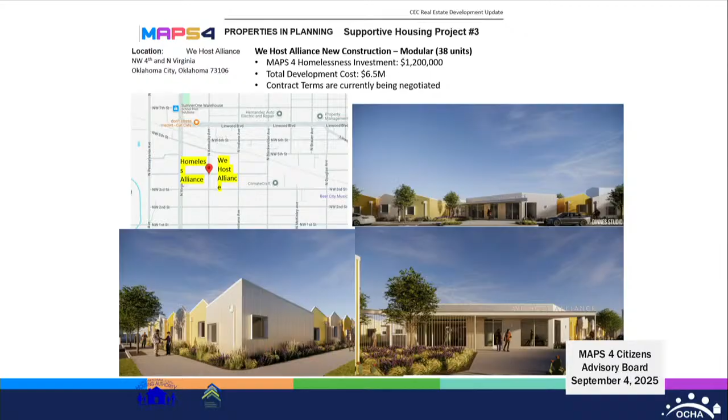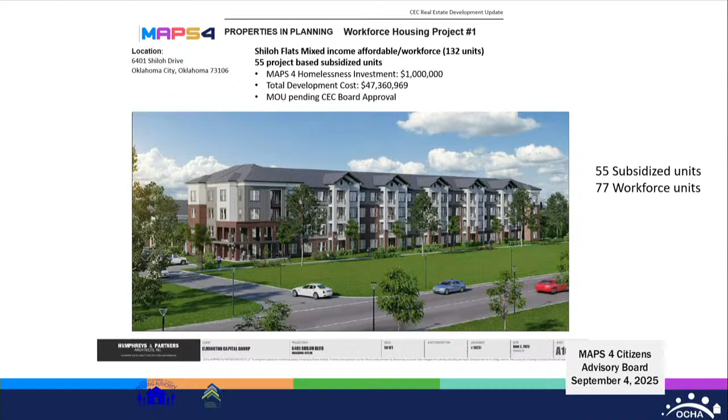That was probably the quickest project that we will have in this entire program, so I'm really happy about that.

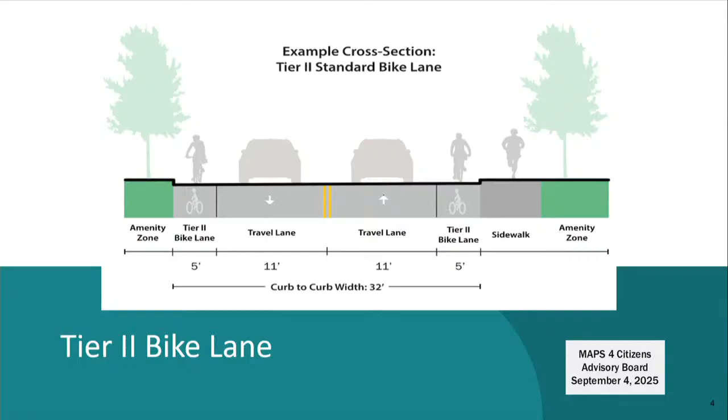Tier 2 is the same thing, just without the addition of the delineator. This is typical for situations where there's a lot of driveways or trash pickup locations - we don't want to create any conflicts with trash collection. Tier 3 is just the shared lane, with a Sharrow placed strategically in the lane depending on lane placement, accompanied by a share the lane sign.

For this contract, RCC Traffic was selected. The contract amount came in at almost $1.9 million. We issued a notice to proceed on March 17th of this year, and the current anticipated completion date is December 10th.

An update on where we're at with construction. We've installed to date a little more than 31,000 feet with almost 200 pavement markers - that's Sharrows - for this project. To this point, we haven't been able to put any bike boxes down yet.

The signal detection has been completed. This doesn't have anything to do with the signalization at 19th and May, that is under construction as well. However, the signal detection upgrades were completed at specific locations that didn't have radar detection to detect cyclists whenever they pull up to the signal.

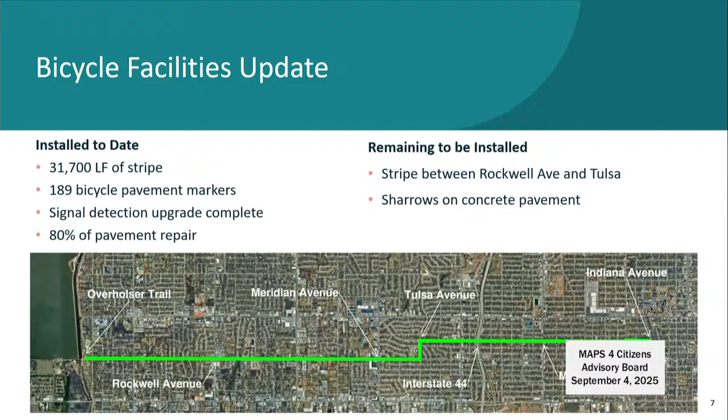This says 80% of the pavement repair is complete, but as of today, all of the pavement repair has been finished. What remains is striping between Rockwell and Tulsa along 16th, and the Sharrows that go on concrete pavement. The Sharrows haven't been installed on concrete yet because it requires a different piece of equipment, so they're doing all the asphalt first and then coming back to do the concrete after.

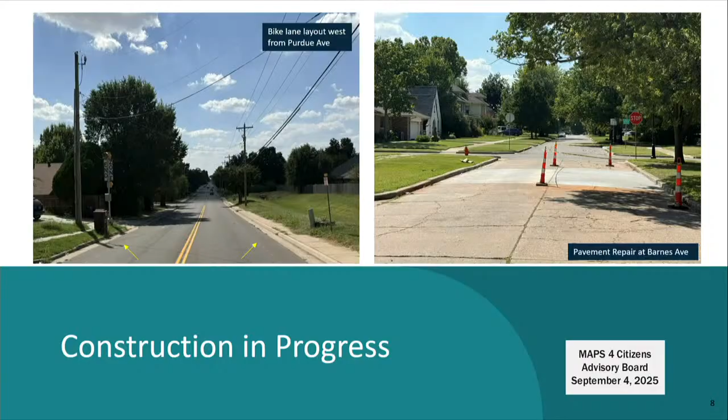You can see in the left picture the yellow arrows point toward where they've already done the layout in preparation of adding the bike lanes along 16th. This is going to be from Rockwell a quarter mile to the east, and between MacArthur and Meridian there's bike lanes there. The right picture is a completed pavement repair where we went in, removed the bad concrete, and replaced it.

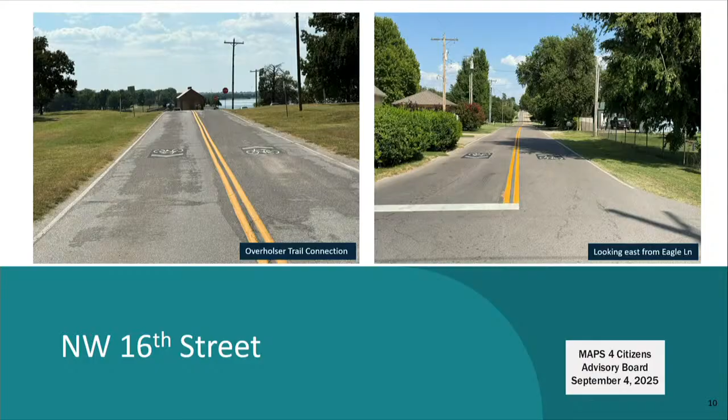Just looking at some of the Sharrows and the striping that's been completed here on 16th Street. This is right around the Council Road intersection, and towards the west end at the beginning of the project at the Overholser Trail, just some more striping that's done along with those Sharrows.

Moving over onto the 19th Street segment, you can see the placement of the Sharrow in the left picture is offset. This is an anticipated location of where it needs to go because there is on-street parking allowed here, so we wanted to place it where we've recognized traffic likes to travel - that way we won't have tires constantly beating it down, hopefully improving its longevity. The right picture is just where we get back into the undivided section and the standard Sharrow placement.

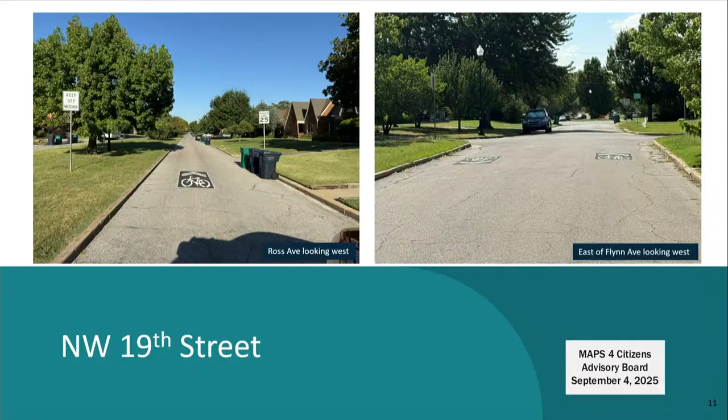The 19th and May intersection signalization update: we have all of the signal pole footings in, including a couple of the pedestrian signal pole footings. The sidewalk on the southeast side is complete.

This week they completed the east center median sidewalk, and we'll be placing the concrete this morning for that northeast corner. The conduit for all the signals has already been installed, and all the pole boxes are already in place.

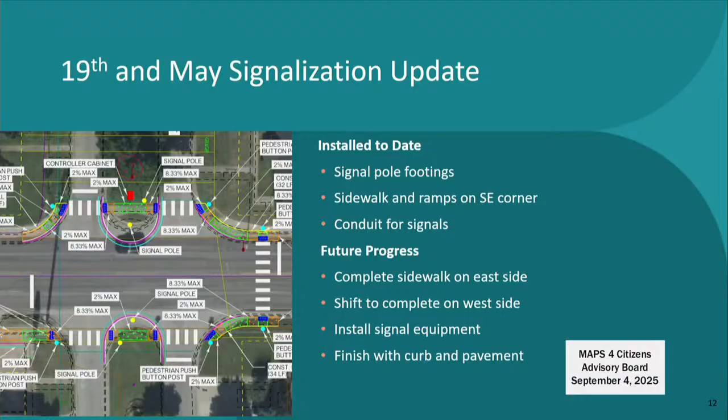That's the southeast corner where we added a crossing for both north-south and east-west. It did not exist before, so we'll now have continuity for pedestrians to cross both north-south and east-west.

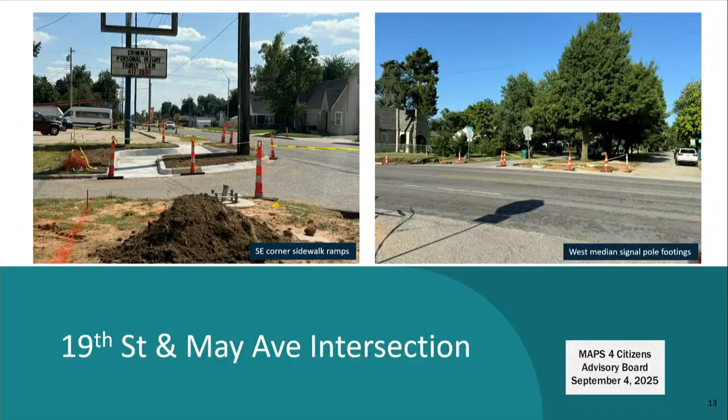The program budget for this was $3.4 million. The original contract amount was $1.9 million. Work to date is a little over $650,000, and the remaining contract is $1.2 million. I'd be happy to answer any questions.

Now to talk about 1B. 1B was Classen Boulevard that extended from Western, where it goes east and west, and curls up north all the way to Britton Road. And then Northeast 16th Street, between Walnut and Bryant.

If you recall, a while back we actually extended it from Katy Trail all the way over to Bryant to make more connectivity with the Bryant bike route.

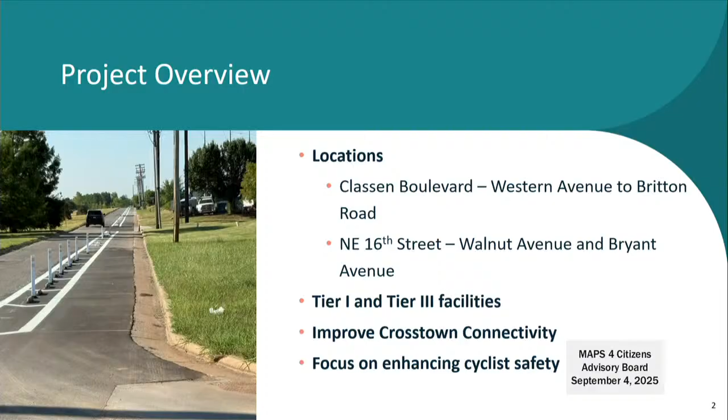With this, we were able to add Tier 1 and Tier 3 facilities, improving crosstown connectivity on the east side of the city, and focusing on enhancing cyclist safety along both corridors. Again, Tier 1 has that protection component to it.

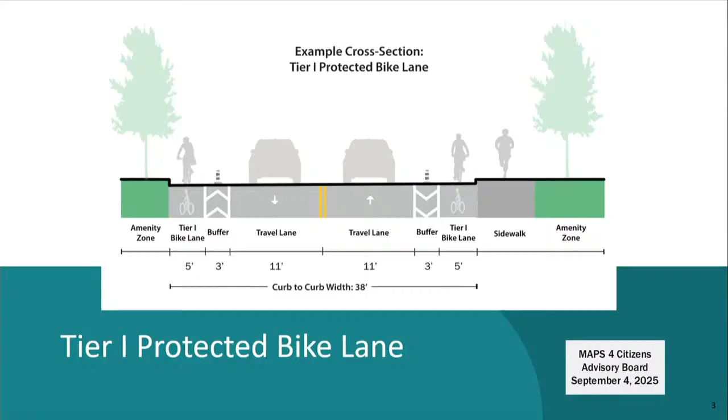We did a little bit of a different style on this, and you'll see some of that in the pictures. There were no Tier 2 facilities, and Tier 3 was again that shared facility, which was a significant portion of the Northeast 16th project.

The contract on this was, again, RCC Traffic. It was a $3.4 million contract. We issued the notice to proceed last November and anticipate it to be completed today.

An update on Classen: we have installed a little over 41,000 feet of stripe, 83 bike pavement markers, mostly bike boxes but also some sharrows. Over 500 delineators. We did a little over 4,000 square yards of pavement repair, and we ended up only having to do signal detection upgrade at Chesapeake Drive.

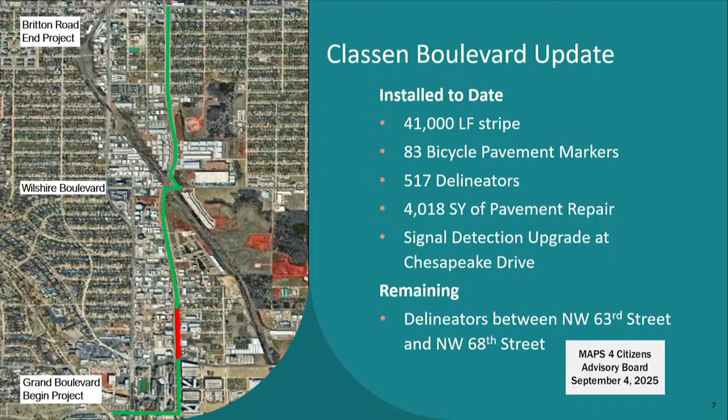We had intended to do it at 63rd as well, but it ended up that the detection was already upgraded at that intersection.

This is completion of Classen by south of Britton Road. We made a change here to add parking because of the potential of a dog park going in the center median. So we worked with Planning and Public Works to revise that, and this striping actually reduced the amount of stripe needed in the contract, so a bit of a cost savings by putting that parking in place.

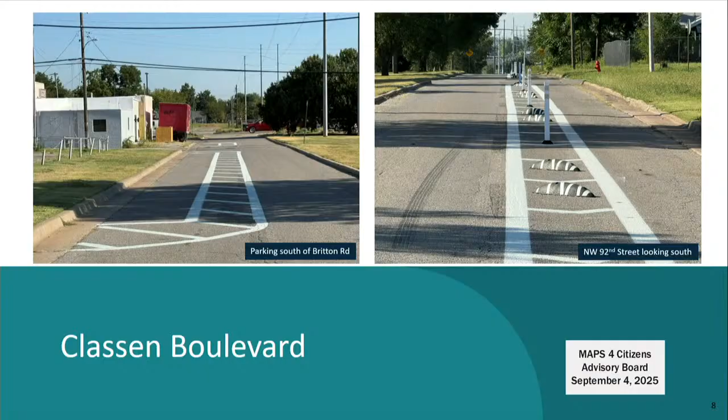You can see in the right picture a new different style of delineator we use. Those small ones are called armadillos. They're actually bolted down to the pavement so they do not come up, and they're very resistant to traffic, as we've already noticed some of them have been hit.

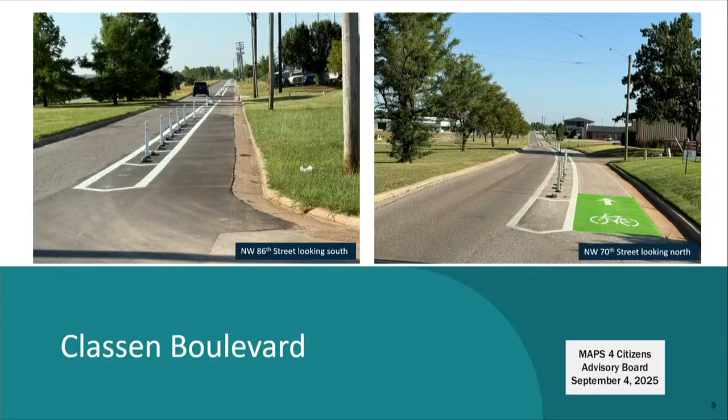Looking a little further south on Classen, a different setup for how we placed the delineators where they were going to be in an area coming in or out of a curve, and we thought that may be prone to vehicles crossing into the bike lane. So we used a curb-style delineator, the smaller one, and increased the visibility by adding more of them.

Moving to Northeast 16th, we installed 9,500 linear feet of stripe and a little over 80 pavement markers. We did a signal detection upgrade, and to date the project is considered substantially complete. We're just waiting on scheduling the final walkthrough.

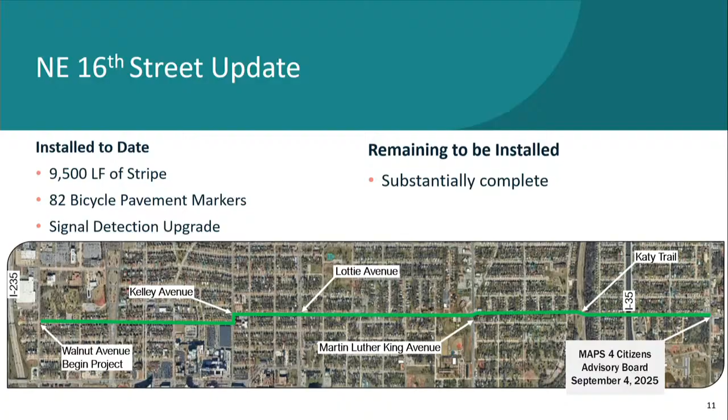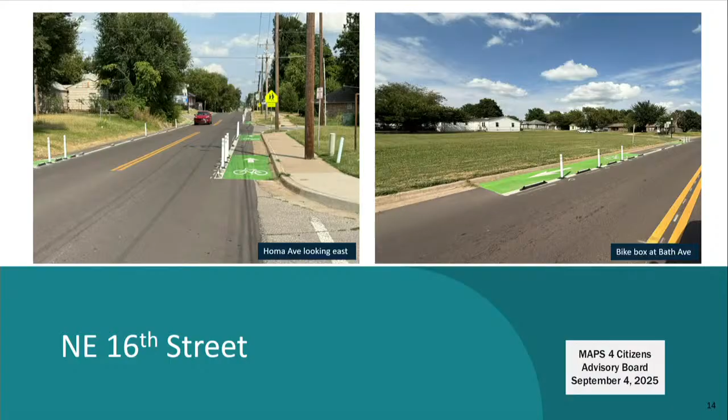And then just more pictures of the sharrows placed along 16th. The right picture is actually where the beginning of the bike lanes start, and the sharrows either start or stop. Some more pictures of the bike lane area. You can see we did that different combination of delineators there to make it a little more protected for the cyclists.

We do have a change order on this. It's a no-cost change order, and it's just to add 48 days. This is due to just some additional work and the weather days that we've had with all the significant amount of rain that's been delaying the contractor's progress.

The budget on this one, we started with 3.5 million programmed. The original contract was 3.4. We did do change order 1 and amendment number 1 for about 35,000. That increased some of the pavement repairs that we needed. We added some items that weren't on there, like curb and gutter, and then we did have some signalization costs for additional conduit that we had to install that we typically wouldn't know was going to be required until we actually got out there and the contractor discovered what we needed to do at those signals. And it's typical whenever we just have an older signal.

The second and third change orders were time only, no cost there. So the current contract amount's just a little over 3.4 million. Work completed to date's at 2.5 million with the remaining 865,000. We do anticipate that we'll have some additional funds left over on this one. We won't use the entire contract value.

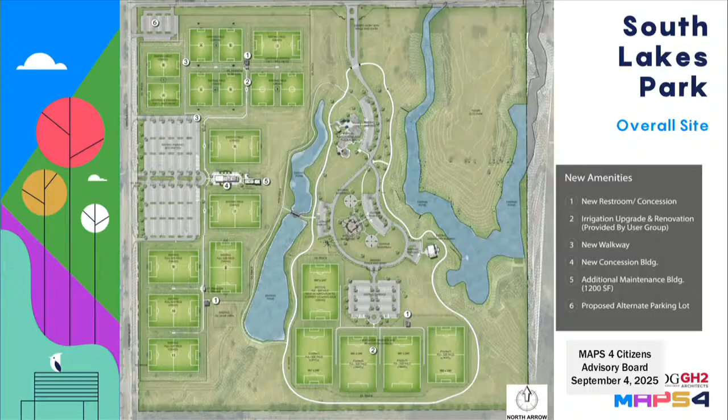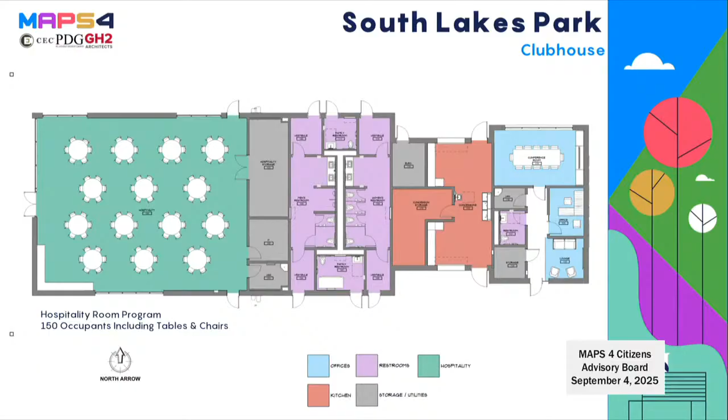In red, you can see the concessions, which can serve the north and south side as well. And then on the east side in blue is the offices.

This is a bird's eye view looking from the west down onto the clubhouse. You can see on the top of the screen on the east side is the existing maintenance building, so this is just adjacent to that.

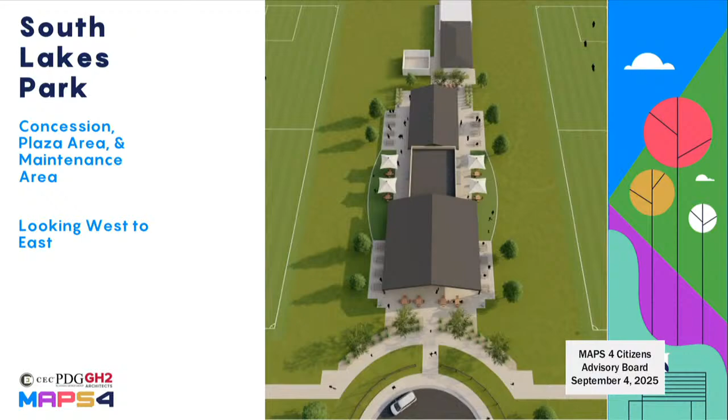A rendering looking at the front of the building. The architecture is designed to mimic the existing structures on site, so it all blends in cohesively. The materials are split-face CMU, which again coincides with what's there. The soffits are a composite wood, so it gets the durability but also the warmth that brings inside the building.

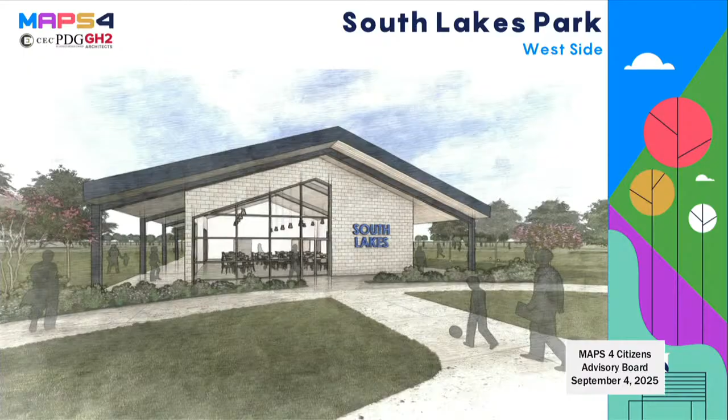And this is a look inside the hospitality space. We've got a suspended wood ceiling for acoustics, and we've got a rubber tile floor, along with a lot of great branding for the soccer club there.

This is a look from the east side of the building. So we're facing the back side of the offices, and this is a space that the soccer club can use for trophy ceremonies and things like that.

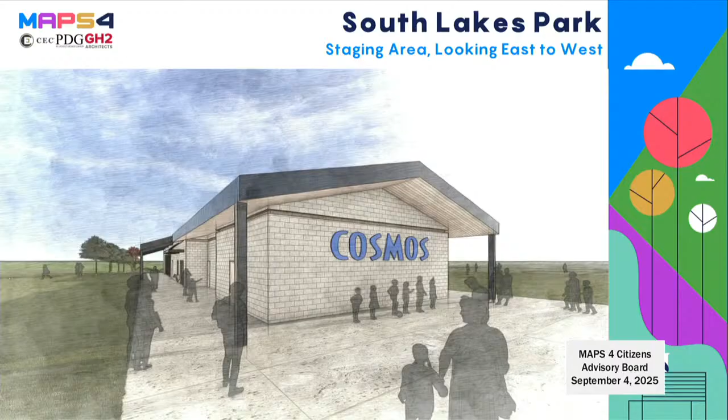This is the maintenance addition. There's an existing maintenance building on site, and we're doing another one adjacent to it as an addition. There will be 3 overhead doors for all the equipment on site, as well as a conditioned storage space for paint and other sensitive materials.

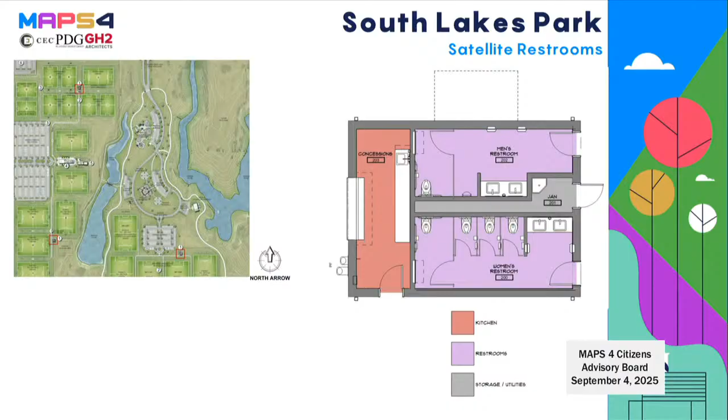As Jeff said, there are 3 satellite restrooms on the site to serve the more remote fields. This is a look at what those would look like. There are small concession spaces as part of those that would serve prepackaged waters, snacks, and things like that, and this is a look at what those facilities would look like.

As Jeff mentioned before, we have a parking lot at the northwest corner that will be bid as our alternate one. That will include sidewalk access around the parking lot into the park, as well as, though it's not shown up here, arterial sidewalk around there.

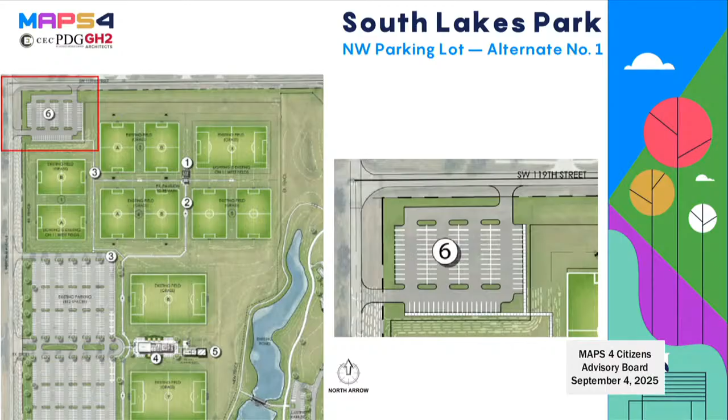Our current construction budget was $6.5 million. Our current base bid estimate is coming in at just around 6. Our 2 alternates are the parking lot that was mentioned and the sanitary sewer for the event center. The event center is at the far east end of the site, and we're hoping we can get that into the budget. Currently, that facility is served on septic, which has downtime on occasion and needs to be cleaned. Eventually being able to move to a gravity solution is a long-term solution we'd like to have at the site.

Just a quick update on schedule. We wrapped up the preliminary report at the end of last year, and just wrapped up final plans. We're ready to move into bidding and start construction in October, ending in October of 2026.

We'd be happy to answer any questions. Okay, any questions? Yes.

Regarding your alternates, is there a priority, being the parking lot first and then the sewer upgrade second, or could those be reversed? During design, we met with the user groups repeatedly, and we prioritized them based on their wants and needs. So this is community desire feedback. Yes, okay, interesting. Thank you.

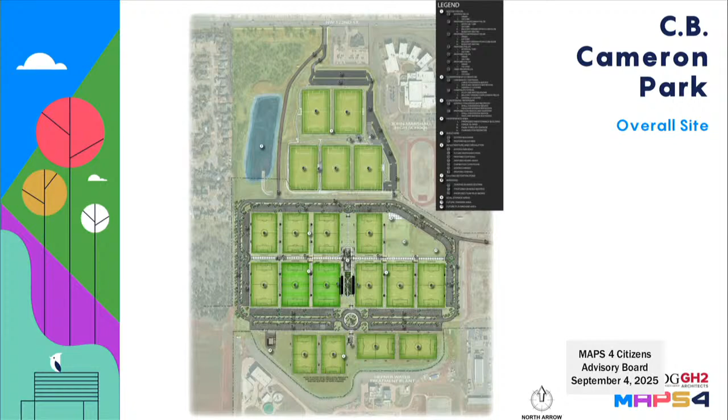Here's an overview of the entire park that includes both the existing and what we're proposing for the new improvements. The majority of our improvements in our project are on the south end of the site, and I'll hand it over to Jeff. Again, this is a master plan that you'll have seen before. Not a lot has changed on the master plan.

As you can see here on this screen, the 5 fields to the north are existing. Those have been constructed, lit, and are in use. With this master plan and what's in our project, you have the 10 fields in the center of the site, and then 4 fields to the south. The user group is going to handle those fields being constructed. We're going to grade the site and prepare it for them, but other than that, that's where it will be left for those 4 fields to the south.

There is a maintenance facility, number 4, on the southwest side. This one has your core area, number 2, in the center of the 10 fields, which will have hospitality, concessions, restrooms, offices, medical space, and some other core areas we'll get into as we go through this presentation. This does have parking included, infrastructure, utilities, irrigation, and the brighter green fields to the bottom left of the core area will be synthetic turf fields. The 10 fields will also be lit as part of the base bid.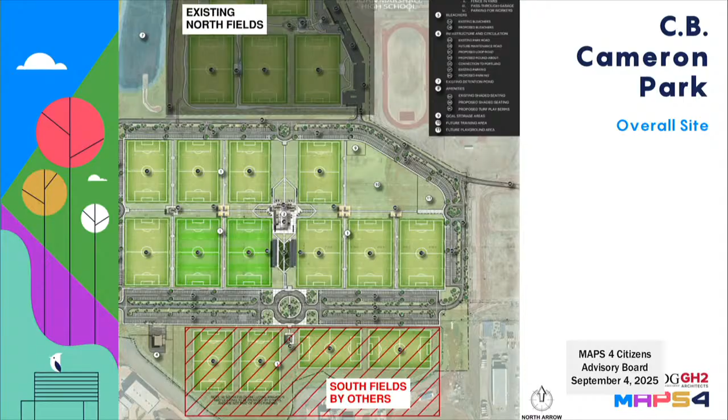Some of the items here, we did work with the user group—we'll clarify that. We worked with the MAPS office and the Parks Department to determine alternates to make sure this one comes in within the allotted budget. Some of the items, like the plaza areas, will be part of the base bid. However, the shade structures are alternate bid items that we're hoping to be able to build as part of the project.

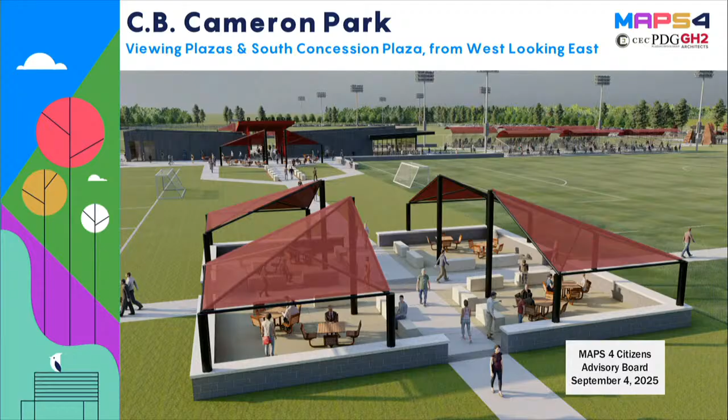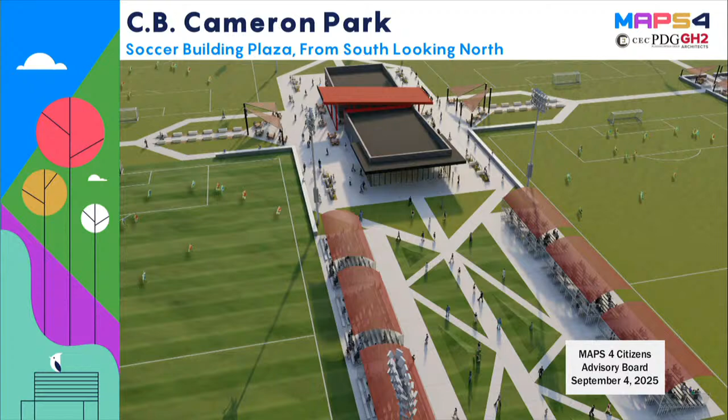We are carrying a large contingency that Lindsay will get into here in a little bit, just to make sure that we keep this in budget. You can see the center core area there, the viewing areas, the bleachers and everything are part of the base bid, but the shade structures above them are alternate bid items as well. Again, another view of that core area and some of the amenities, the sports lighting and everything that go with that. And then Sarah's going to talk a little bit about the buildings on this one.

Thanks, Jeff. So in this, the north is to the left, and the hospitality space is looking out onto that core that we saw. It accommodates 150 people. There's concessions that open up into this plaza that goes directly through the center, so it's this nice breezeway, about 24 feet wide, plenty of space for people to walk back and forth and line up at concessions. Restrooms are in the purple, and those accommodate all of the bleachers, so they're nice large facilities with the family restroom and the adult changing station. We also have a medical space in this clubhouse in the orange, and the office spaces in the blue.

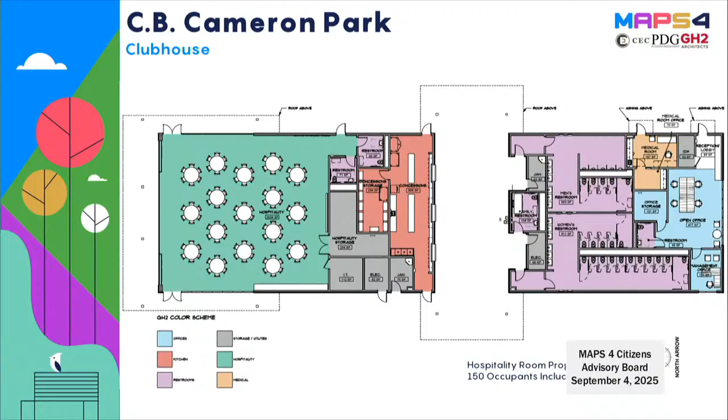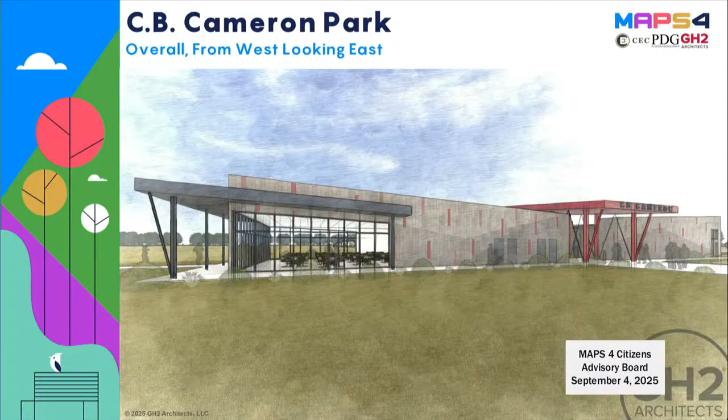This is the maintenance building on the southwest corner of the site. It's a shop with 4 overhead doors to allow them to take the equipment in and out. They did need office space, is what the user group indicated. So we have office with restrooms and a conditioned storage space as well.

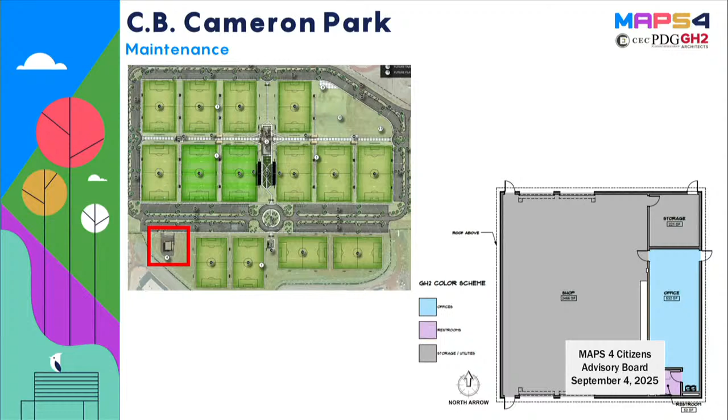The 2 satellite restroom buildings are alternates currently, and those are very similar to South Lakes in that they have concessions as well, small spaces that can be used to serve water bottles and prepackaged things.

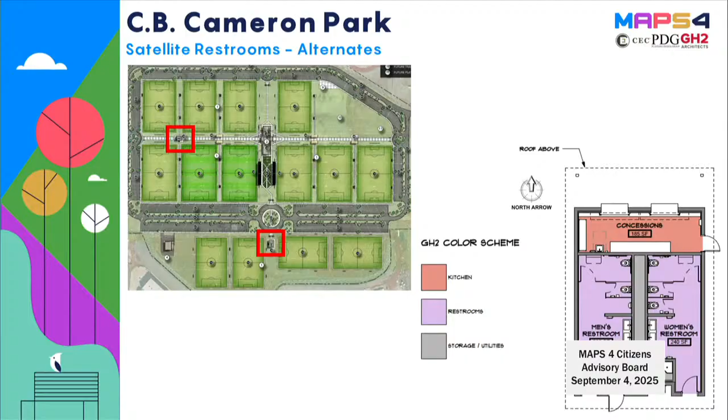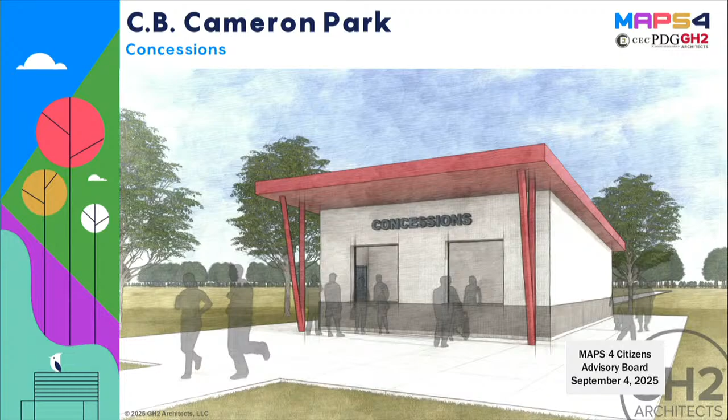Our construction budget for this project is about $19.5 million, and right now our cost estimate for base bid is pretty close to that. It does have a contingency included, so we are still accounting for some of that. We have multiple alternates that were mentioned: the restroom facilities, some of the parking lot, lighting, spectator amenities, soccer club amenities. Throughout design, we worked with the user groups and MAPS to really outline everything that was wanted in the base bid and make sure we got that in there, then prioritize the alternates accordingly.

We wrapped up the preliminary report at the end of last year, finalized plans recently, and are ready to bid this next month with an expected construction timeline of a year. We'd be happy to answer any questions.

Okay, any questions on this presentation? CB Cameron Park. Okay, if not, take a motion and a second. Thank you all very much. Take a motion, motion and a second to approve the plan.